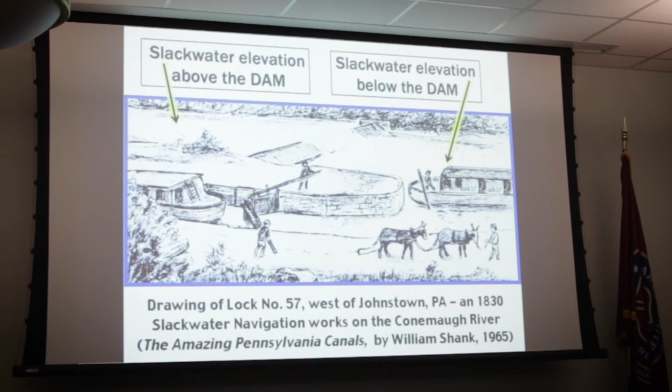So here's the dam. Now the key thing is, on a slackwater navigation on an existing creek, you basically have the dam going to a man-made island in the creek. The dam only goes partway across. On the other side, you have a canal lock, and that canal lock is used to raise and lower the boats around the dam. So you basically have slackwater for most of the length, and this is basically a lock that is traditionally as shown on a canal.

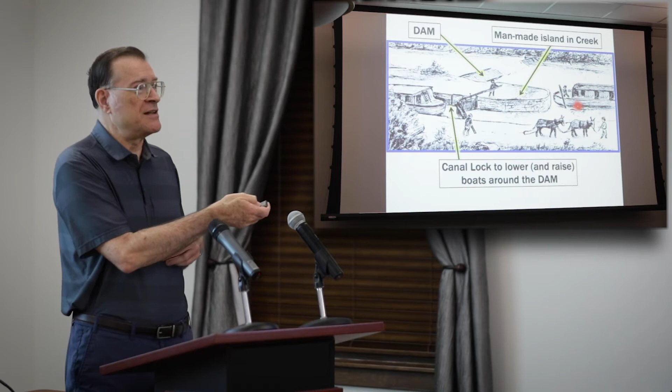Now, I'm not going to go through all the terms here, but I missed something, so I'll go back. Now, the key thing as far as moving the boats around on the slackwater, traditionally it was done with long poles. So you have a long pole that you can push the boats around. None of these boats had motors, so these are motorless barges. You basically have the mules pulling them over a length, and a pole to navigate them through the locks, because the mules didn't pull through the locks. So essentially that's how they were navigated.

Now, the terminology: the inside dimensions of the Codorus navigation locks were 95 feet long and 18 feet wide. Traditionally, I think the biggest boats that I've seen in newspapers were 70 feet long, so you still had some room on either side to operate the lock gates. In this drawing, I'll go into the terminology as far as operating them, not how they were designed.

First, focus on the balance beam. The balance beam up here is designed to be very heavy at one end and long, and that is to counteract the weight of the lock gate, so that one person can easily move the gate. Here it's like halfway closed. When it's fully open, it's back in this recess here, so the boat can move by it.

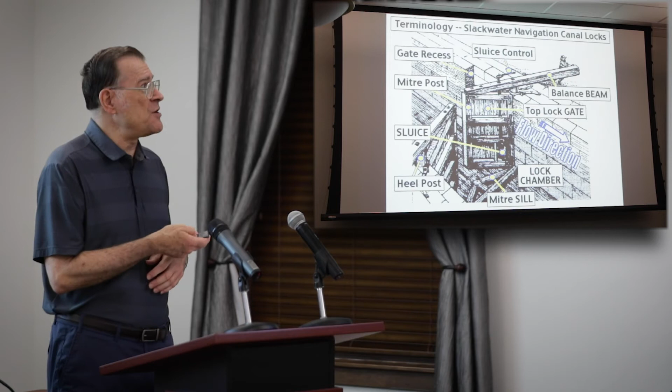Now, a presentation on early waterway navigation in York County would not be complete without noting the first working canal in Pennsylvania was in York County. The mile-long canal with 2 canal locks was located just north of York Haven. It allowed boats to get around a 19-foot natural drop in the Susquehanna River known as the Conewago Falls. The canal opened in 1797.

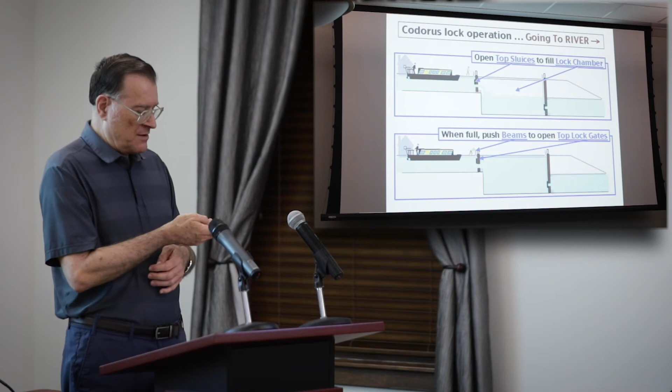Now, for a little bit of detail on how the Codorus navigation system worked, here a boat is traveling down the Codorus toward the Susquehanna River. In the top illustration, after the mule driver ties up the mules, he opens the top sluices right here and allows water to fill the lock chamber. Once the water is filled, he basically pushes the beams to open that lock gate and allows the boat to move into that lock.

Now, moving the boat into the lock is all done with poles. The person on the boat uses them, and occasionally the mule driver will assist from up on the upper area of the lock. Once the boat is in the lock, the mule driver will close this gate and go to the other side and open the sluice. And that lowers the boat in the lock.

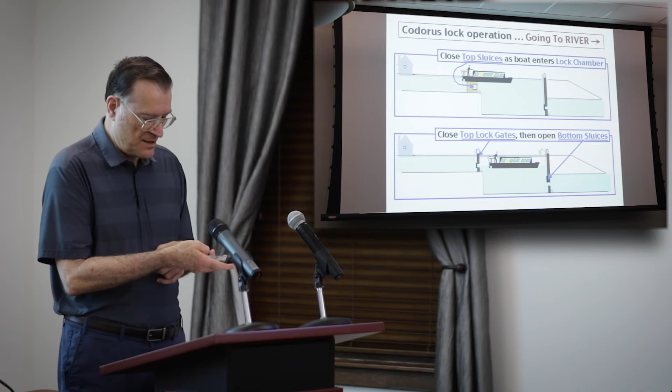When the boat is down at the lower level, then the water levels equalize with the slack water below the dam, and the boat can exit. And after the boat exits, they close the bottom sluices. That was the main rule: whenever a boat goes through, you always close the sluices. So the sluice is always closed for the next boat coming up or down the navigation works.

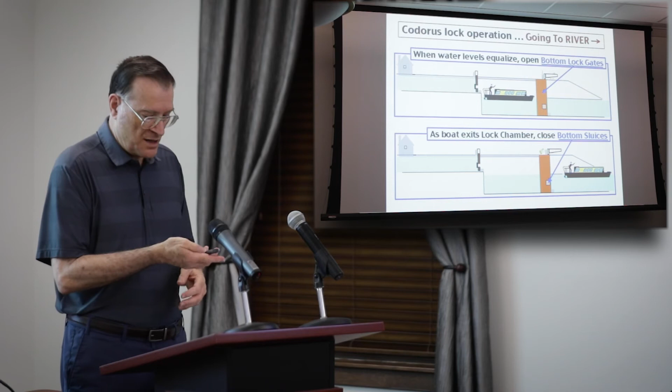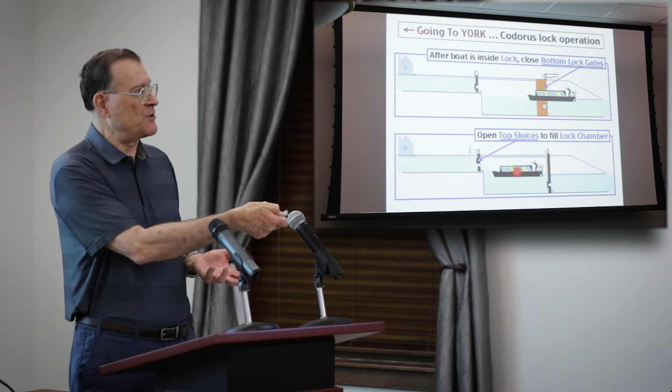So just a quick look at when it's going to York. After the boat is inside the lock, the bottom lock gate is closed. Once it's closed, the mule driver goes up and opens the top sluices to fill the lock chamber. So the boat is now rising because water is filling into that lock chamber. And once it rises the whole way to the top, the mule driver pushes the beam to open the top lock gate, and he closes the top sluices as the boat exits. So that's how the boats moved up and down the river using locks.

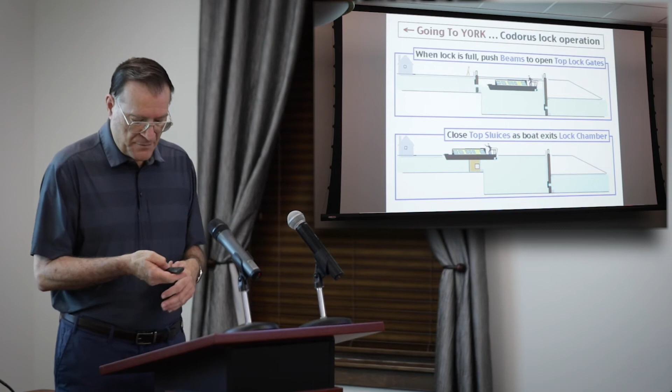Now, all the talks I attended on navigation on locks and basically equivalent systems of canal navigation said you never use mules to pull it through the locks because you can cause damage to it. They always used these poles, and the people that gave these talks said whenever they tried it, it's simply tapping it just a little bit, because if you push too hard, you have to push equally hard in the other direction to stop it hitting the other wall. So it's a delicate touch to move these canal boats through the lock.

And to navigate them in the slack water, when the mules aren't hooked up to them, you have this example. The canal boat operator is using the long pole as a lever when he's getting close to the dock. Once he's out in the pool, he basically pushes it along. I've visited some canals in England, and it's amazing how they can move these big boats just with these poles.

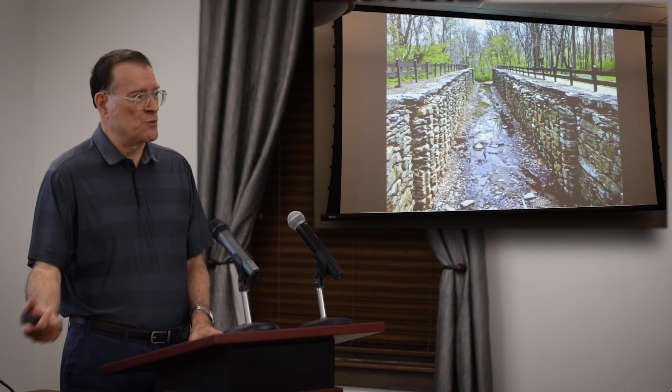Now, we'll take a look at starting in York and going down the Codorus Creek. Now, I'll focus mainly on the area of Springettsbury Township in this talk.

My full talk is basically like an hour and 45 minutes, but I'm doing the 60-minute talk tonight. So, let me check my time there. I think I'll be pretty close.

In 1852, we'll start off here at navigation in the borough of York. Now, in 1852, J. Thomas Williams, a York photographer, published this view of York looking south from the hill in North York. It was a lithograph shown at the bottom, produced from photographs that Williams had taken. At the top of this slide, I zoom in on the two canal boats being pulled along the Codorus through

York Borough. Even though the full length of the Codorus Navigation ceased to operate in about 1847, sections between York and the four flour mills to the north operated into the 1850s. You can see that in these days, the Codorus Creek in the city was not a deep ditch as it is today. That all changed after the big flood of 1933 when the Army Corps of Engineers got involved with it right before and right after World War II.

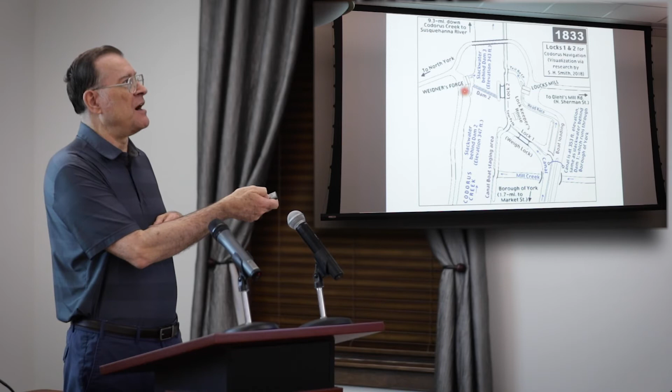After the boat left the Weigh Lock, then it would move down to Dam 2. And that was an existing dam there, what was for Weidner's Forge. And Weidner's Forge operated there, and it was later a mill at that site. But this was a lower head dam, and that particular dam was there until, let's see, the flood of 1933 basically took that dam out. And it took out the Weidner's Forge, which was left over.

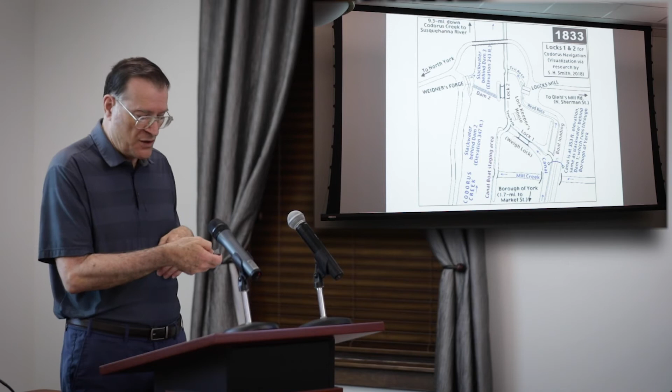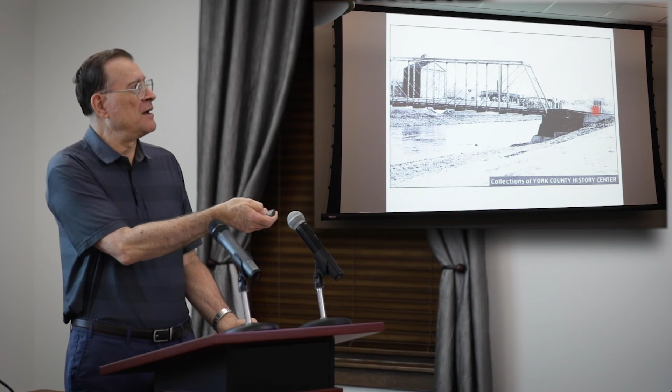This is a neat photo of looking at the cars waiting for the oncoming traffic to pass over it. So just imagine you have 30 cars backed up trying to get across the railroad tracks, and then they come upon this, and then they have to wait in line again to get across that bridge. Not fun times. And that was only back in 1948.

Is anybody living in 1948? I guess some people are. You probably didn't go on this, did you? No.

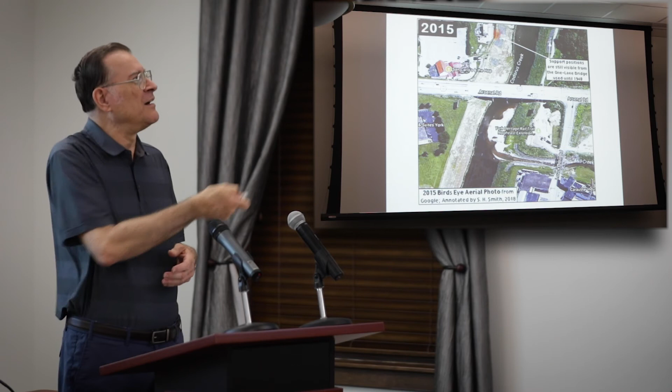Now today, this is an aerial photo. You can still see basically the supports for that 1884 wrought iron bridge are still there. So we'll go up to the next lock. This is looking at the Codorus Creek in 1833 as we reach Lock 3, which is Smalls Mill and Dam 3.

Now, essentially, this particular dam, a mill did not exist at this point. However, P.A. & S. Small discovered the fact that a dam would be placed here and it was needed for the Codorus navigation works. So they immediately purchased adjoining land to build a mill at the site, concurrently with the dam being built. So this dam and this mill was built at the same time. That's why the dam comes right off the end of the mill. So essentially this mill site was determined because the Codorus navigation works decided they needed a dam at this location.

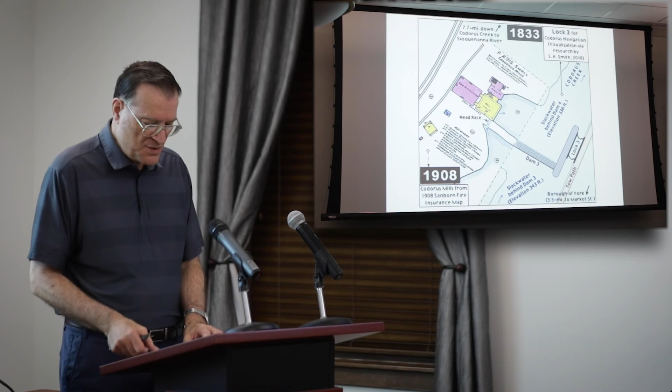So this is a Lock 3 visualization, partly using a 1908 Sanborn map. The right side of the illustration basically shows where the lock would have been. Here's the dam, here's the lock that was used, and the towpath is pretty much all on the Springettsbury Township side of the creek. Now, the other part of this shows that you're going from a 350-foot slackwater elevation, backed up down to Dam 4. So you're going from an elevation of 350 feet down to 343 feet. So pretty much all the mill dams were raised to 7 feet to create 7-foot locks.

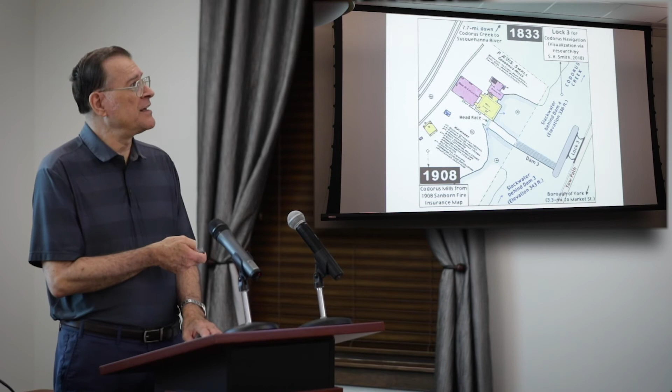Now, the neat thing about this photo, you can go to a 1937 photo that shows the dam. It shows the slackwater below the dam, up to the mill here. The Smalls Codorus Mill was last run by water power in 1945. And the reason was, the Army Corps of Engineers were working on the Codorus flood control project, and they were blowing up dams all along the Codorus. So they blew up this dam on September 5th, 1945. So they breached that dam. Again, that was part of the Codorus flood control project.

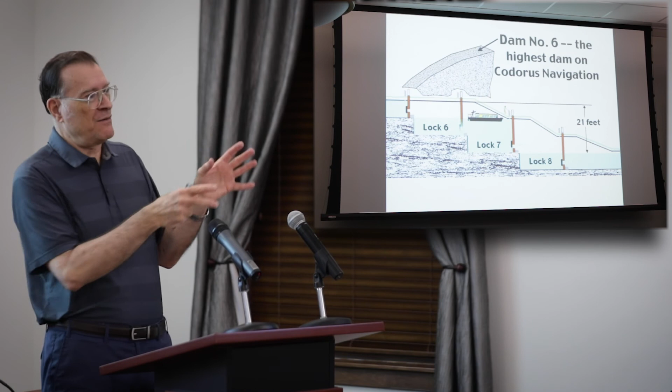This is my visualization of what that looked like. That top is supposed to represent the dam breast going across there, and then you have the lock system, locks 6, 7, and 8. Again, they used 7-foot locks. They liked to have standard lock heights all along because it made interchangeable parts from one lock to the next. But that gives you a basic idea of how a step lock works.

This is where it was placed, south of where the Starview Sportsman Association grounds are located. This is a very isolated place, and landowners don't like you to be in there. Mike Spiker was friends with a few people down creek, so he was able to get in to take some photos.

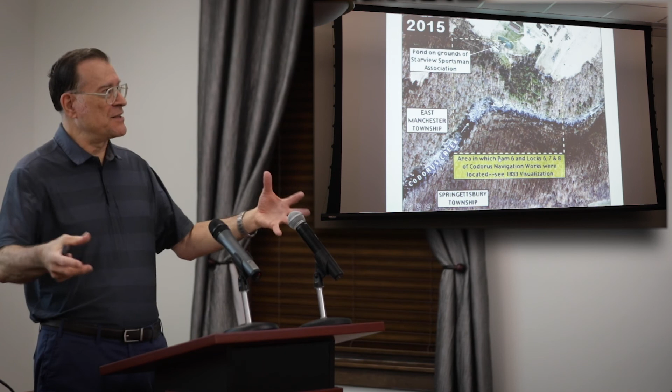Early on, the Welland Canal locks, they had 40 locks that opened actually before the Codorus navigation system opened, I think around 1829, so you could navigate boats around Niagara Falls.

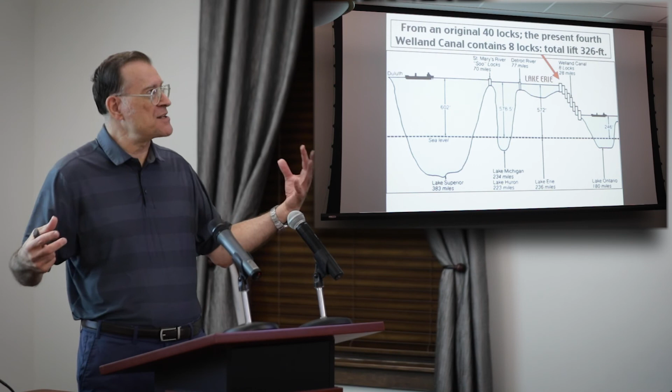So this is what those 8 locks look like now, with a lift of 326 feet. They're still using staircase locks.

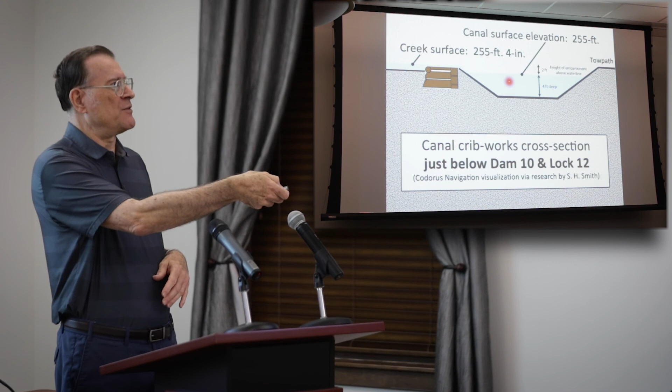So this is just below Dam 10. If you go halfway down to the river, then you have the crib works. You're basically keeping the same elevation here, the 255 feet, but the creek elevation is higher and shallow. Now, those crib works - when they were dredging the area for a new highway in Philadelphia, they came across similar crib works and discovered these were the remains of a canal that utilized crib work construction. These survived from the 1820s because they were in the mud and muck of the Delaware River.

So you have the wood here of a crib works in Delaware surviving.

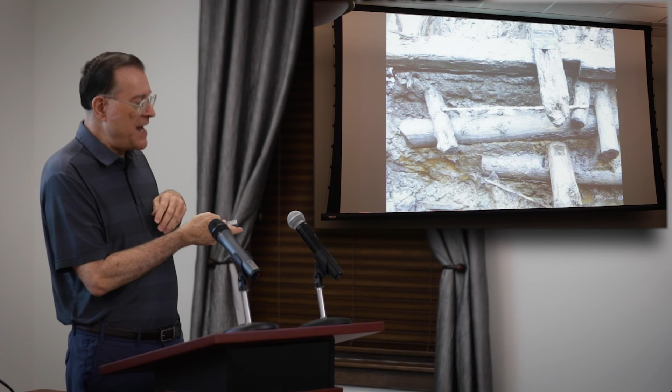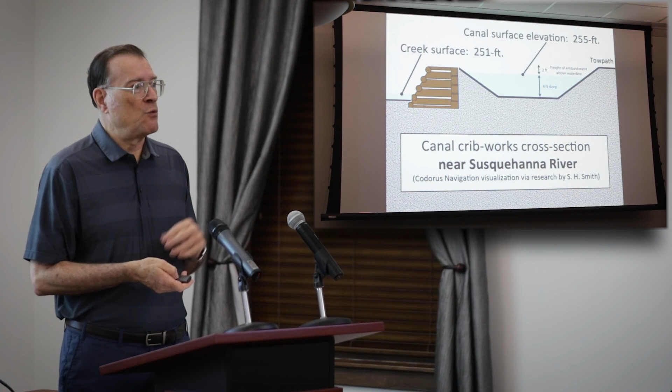Here's halfway down to the river from Dam 10, and here's the full way down. You have the 251-foot elevation of the Codorus Creek where it enters the river at that location, and the 255-foot elevation to enter the river right above the rapids. They're known as chestnut ripples on some maps, or the Hadelman Rapids. Basically, they're 4-foot higher elevation on the Susquehanna River than the exit here.

Above here, the water is fairly calm and allowed boats to go across the river simply by using poles to connect with the Pennsylvania Canal system on the other side. I haven't found any evidence they actually took the canal boats into that. They probably simply docked there and offloaded their cargo to a canal boat that is part of the Pennsylvania Canal system.